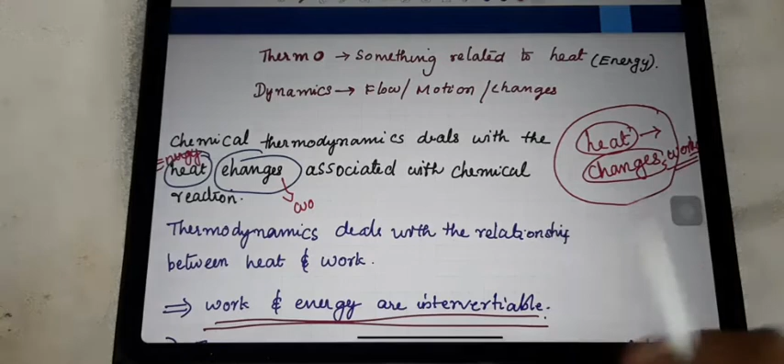So here, heat changes. There are two important terms in this heat changes. Heat change, how it is happening? Due to the work. When any work is taking place, that time the change will happen. So heat and work are the two important terms in thermodynamics. This is the easy way of remembering thermodynamics. Heat changes is said to be thermodynamics, and the heat changes mean the change will happen always when there is work. So heat and work are the two important terms of thermodynamics.

So we can say one more way, thermodynamics is the relationship between heat and work. And this heat, in terms of thermodynamics, we consider as a form of energy. So according to the situation, either in terms of the word heat or energy we are using. So here this heat or energy and work both are interconvertible. That we can explain with the help of different examples.

First one, we are taking food, daily we are taking it. So after having the food, we are getting some energy. Due to that energy we are working, right? So energy we are getting from the food, and because of that only we are working. So what do you understand? The energy is interconvertible. Energy changes to the form of work, right? It is an easy example.

Lot of other examples, it's the turbine, electricity making. You know that when water falls on the turbine, due to the running of the turbine, electricity is produced. So in that example, what do you understand? Turbine rotation, turbine running, it is one form of work. Due to that we are getting electricity. Electricity is a form of energy. So here what happens? The work is changed into the form of energy.

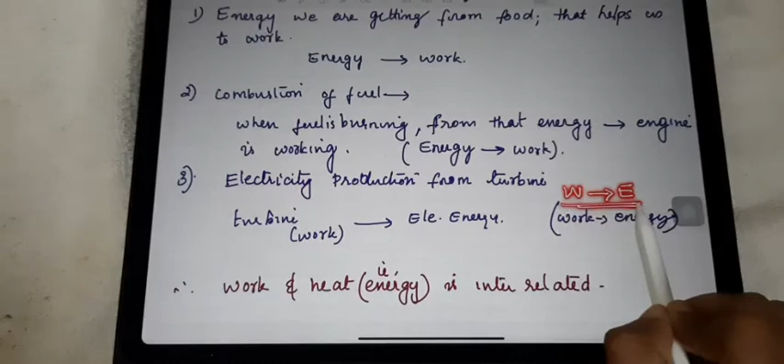So in the previous case, from the food we are getting energy, due to that we are working. So energy is changed to work. But here, due to the running of the turbine, the turbine is working, due to that electricity is produced. So work is changed to energy. That's why we are saying that work and energy both are interconvertible. They are related to each other.

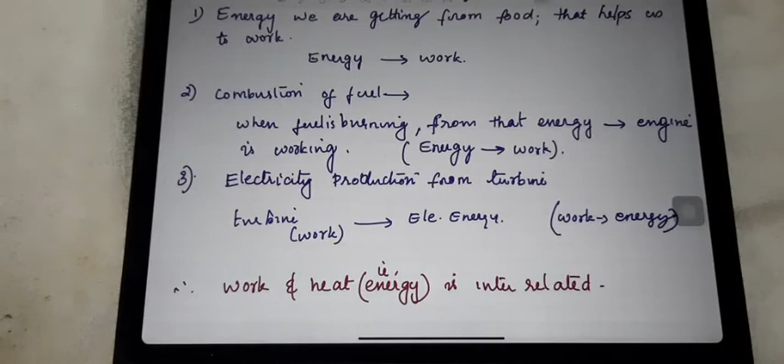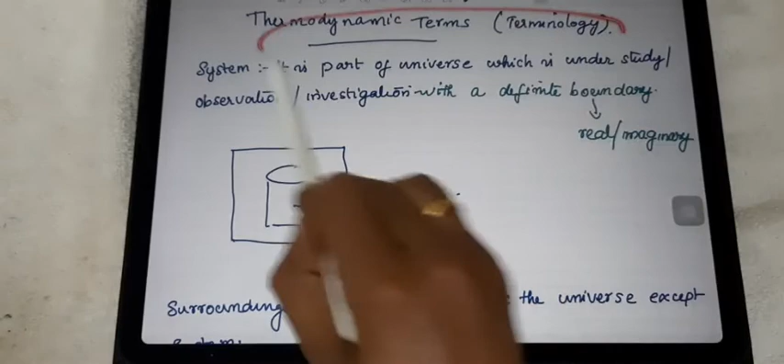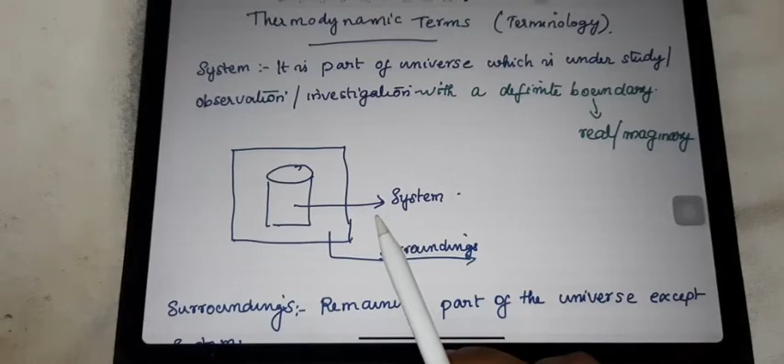Now let us discuss some basic terms which are required in the study of thermodynamics. Important terms, so we can use the term terminology. One of the important terms is system and surrounding. That is a very easy portion, the words system and surrounding. What is meant by the word system? It is a very easy word. So for easy understanding, I am taking one example.

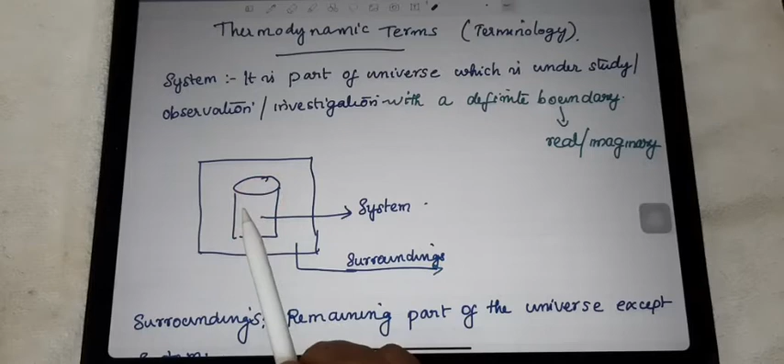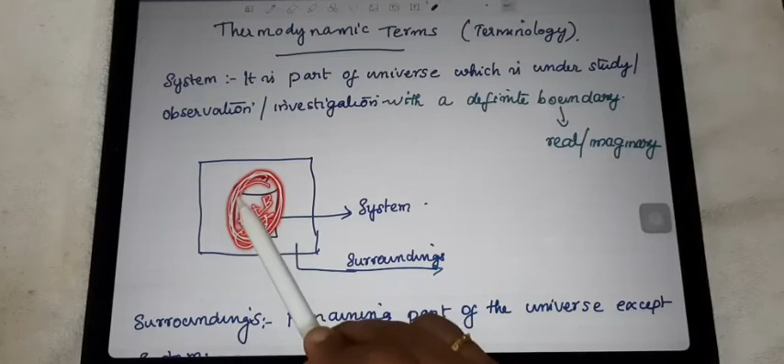This is considered one beaker. In chemistry, we are mainly dealing with chemical reactions. So one of the chemical reactions we are doing in this beaker, just imagine like that. For that I took two components, any two substances taken here, and one chemical reaction is taking place in this beaker. So this beaker we are observing now, or about this chemical reaction we are studying now. So this whole beaker we consider as a system.

Outside of this beaker we call the new word, surrounding. The outside of the beaker, that whole area, whatever is outside of that beaker, all comes under the word surrounding. Okay, so we can discuss the definition now.

The system means it is a part of the universe which is under study. Under study means here we are studying about the chemical reaction in this beaker. That one is said to be the system. It is having a definite boundary.

There is an outside of the beaker, it has a well defined boundary. It's there. Sometimes in some situations we just imagine that boundary. That's why we say the boundary may be real or imaginary. Outside of that, we call it surrounding.

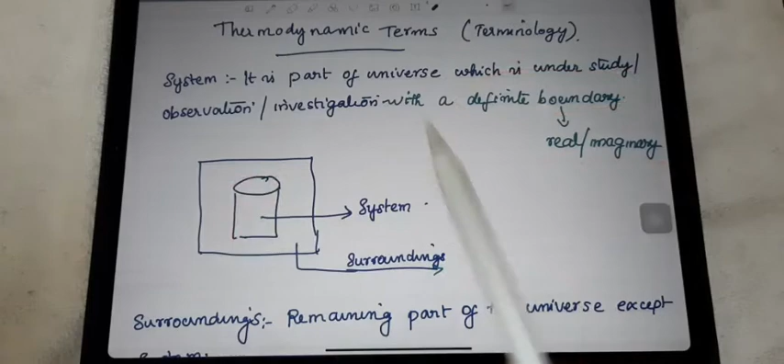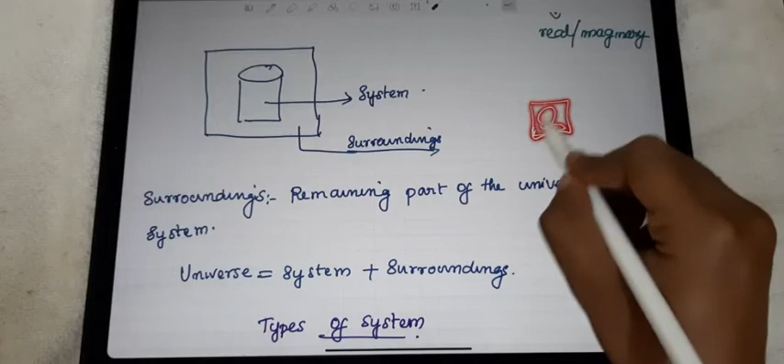If you just imagine the whole universe, when you study about any small thing that you consider as a system, surrounding is the remaining part of the universe except the system. So universe as a total is when you consider system plus surrounding. When you imagine this beaker, whatever is outside it, all together we consider as surrounding. So when you add system plus surrounding, you get the universe.

Now we can start the next topic, types of a system. There are mainly three types of a system: open system, closed system and isolated system. Open system, we can prove with an example.

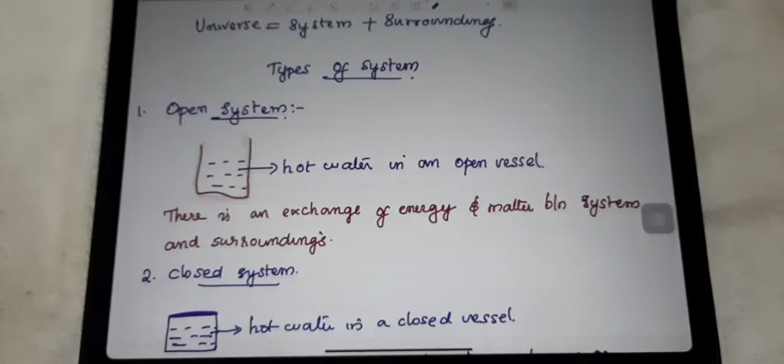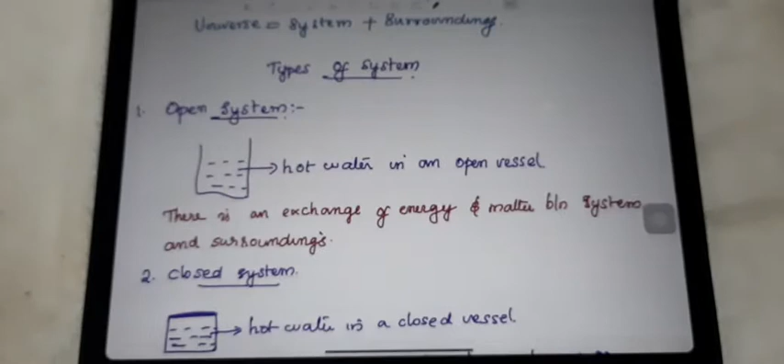Just imagine this is either a hot cup of water or hot tea, anything. So in this beaker I took hot water. The beaker is opened, there is no lid or closed situation. In this situation, after some time, the water will be cooled.

When you wait some more time, what will happen? The content of the water reduces from the beaker, due to the evaporation process. So first it was hot water, after some time it changed to cool water. Then when you wait more time, the content of water reduces again due to evaporation. So what really happened?

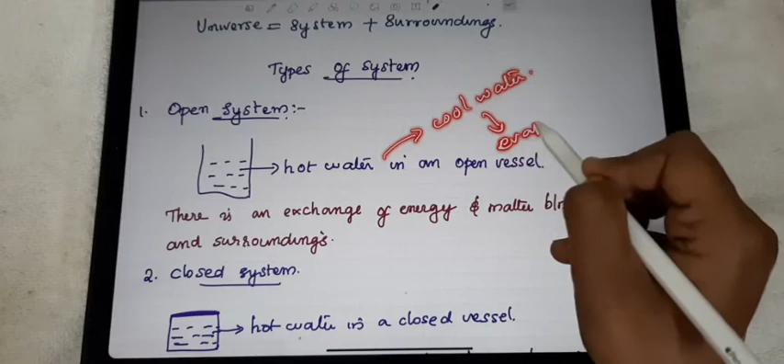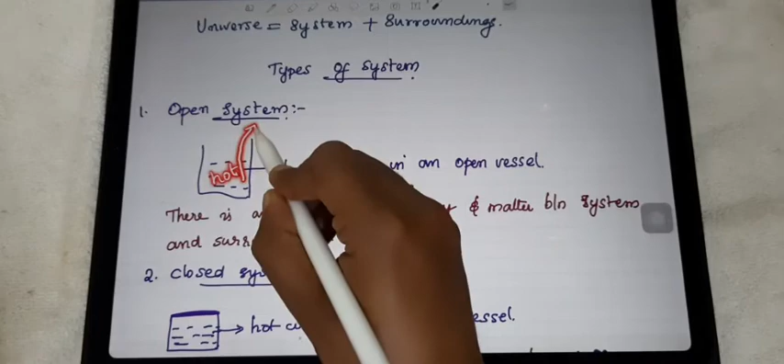Hot water means the heat is the energy form at first. Then how does the water attain the cooling condition after some time? Because this hot condition or heat from the hot water is going out. That means the temperature is going out.

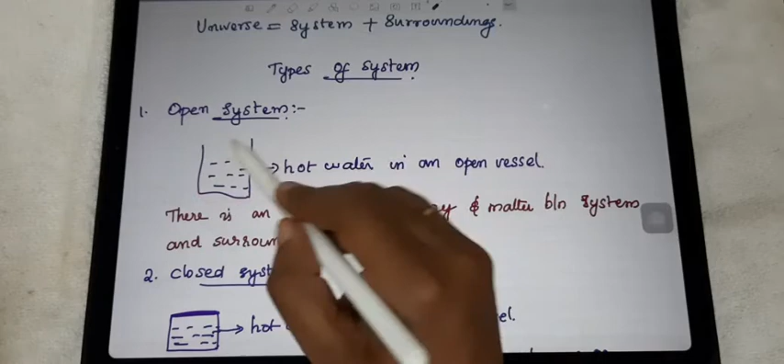So we are studying about this beaker now. We can imagine this as the system. Outside of the beaker, whatever is there, we imagine as the surrounding. Then how can we explain the open system?

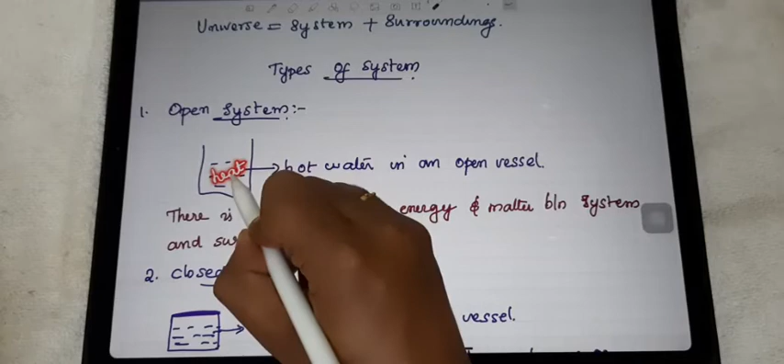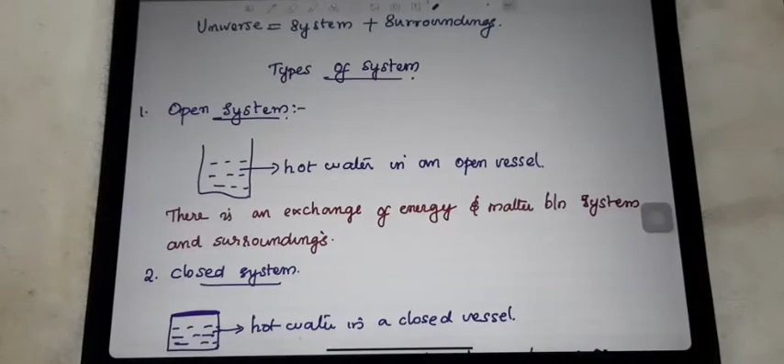Open system is a simple thing. We can explain it like this: the heat from this beaker, that means from the system, is going to the surrounding. So we can say that heat is transferred to the surrounding, that means energy is transferred to the surrounding. That happens first.

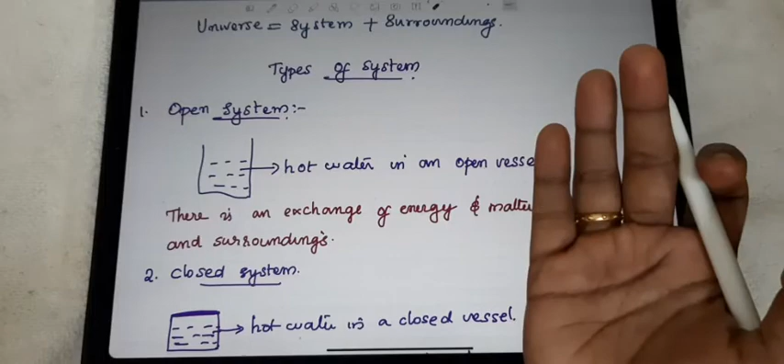After some time, what happens? When it is kept the same way for long hours, what will happen? The amount, the water content, is also reduced. The water, we can say, is matter.

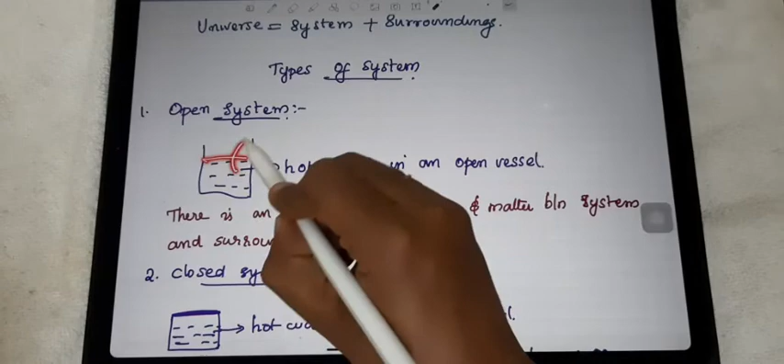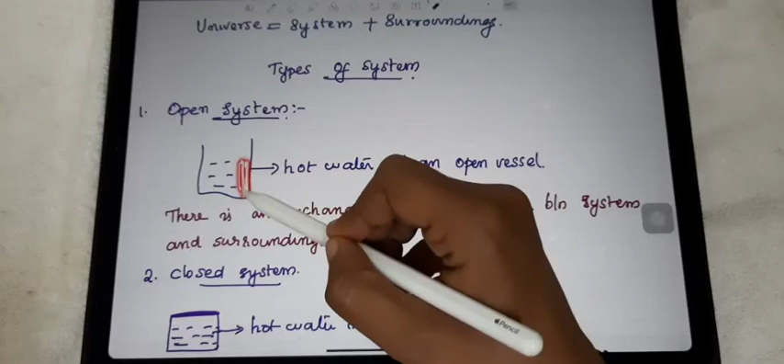First we said that energy is transferred between the system and surrounding. Not only that, we can say that matter is also exchanged from the system to the surrounding. That is why the water content from this beaker is reduced, some of the water escaped as vapor form to the surrounding.

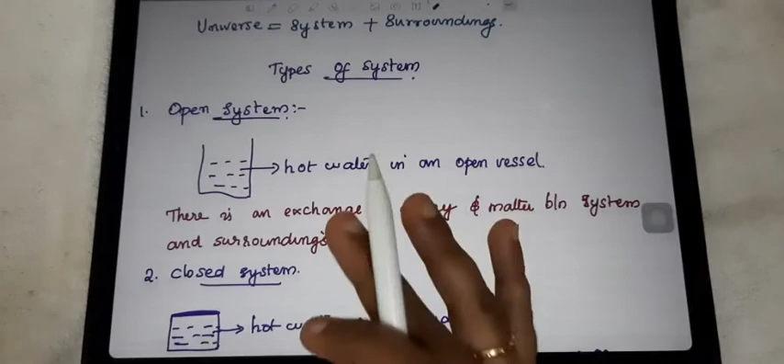So open system means here both energy, that is heat, is transferred, and also matter is transferred. Such a system we call open system.

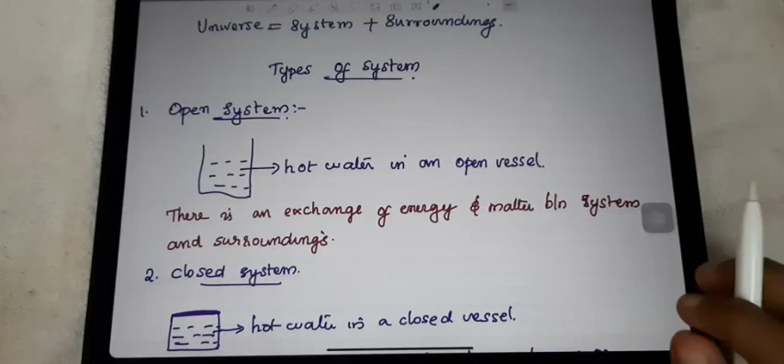Okay, next one, closed system. Just imagine this is one closed system, here hot water is there. So when it is a closed system, hot water is also there. Surely, just imagine after some time what will happen? After 1 hour, it's surely cold water.

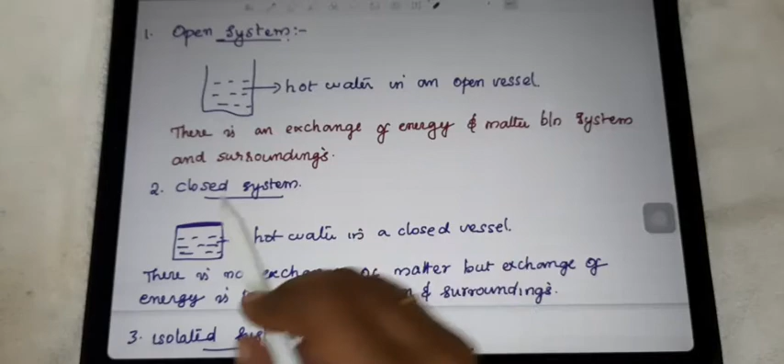What about the content, the matter inside that beaker? There is no reduction of that content, because it is closed. What happens is, due to evaporation, the water molecules, the particles, will evaporate, but when they reach the lid, they come back in the form of water again, due to the process of condensation.

The amount of water is not reduced inside this beaker when kept for a long time, because there is no exchange of matter between the system and surrounding, but heat is exchanged between them. That is why when we touch this beaker, after some time it will be cooled because of the transfer of heat.

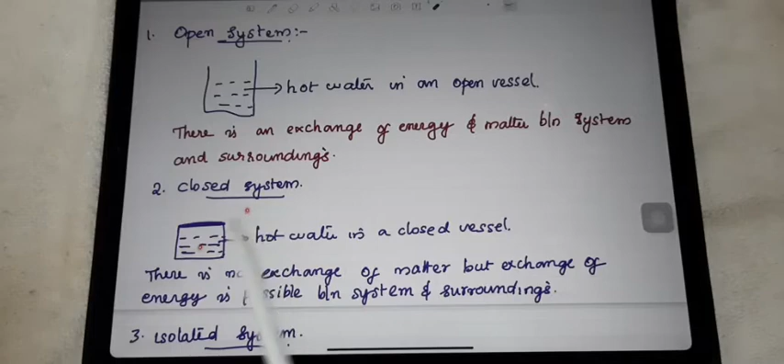So we can say there is no exchange of matter, but there is an exchange of energy possible between the system and surrounding. Heat, that is energy, is transferred, but matter is not transferred.

Next is the isolated system. A simple example is the thermoflask, which we are all familiar with. A thermoflask is used for keeping either cold water or hot water for a long time in the same form.

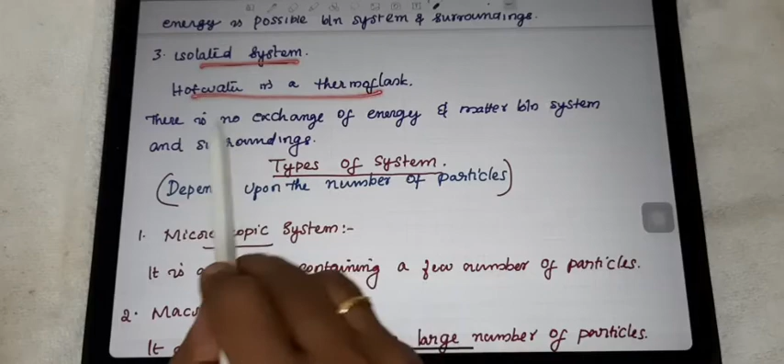So is there any exchange of heat, energy or matter to the surrounding? Imagine the thermoflask as a system. Is there any energy change to the surrounding? No, because that's why it keeps its temperature for a long time. So in an isolated system, there is no exchange of energy or matter between the system and surrounding.

One more way the system is classified is based on the number of particles in the system. On that basis, the system is classified again into two types: microscopic and macroscopic.

Micro means small number, few number of particles. So when the system contains a small or few number of particles, that type of system is called microscopic. Macro means big, so when there is a large number of particles, that type of system is called macroscopic.

In the case of the thermodynamics chapter, we are mainly discussing macroscopic particles rather than microscopic ones. So when you consider the macroscopic particle, what all energy changes and heat changes are happening, on that basis we are mainly studying this thermodynamics.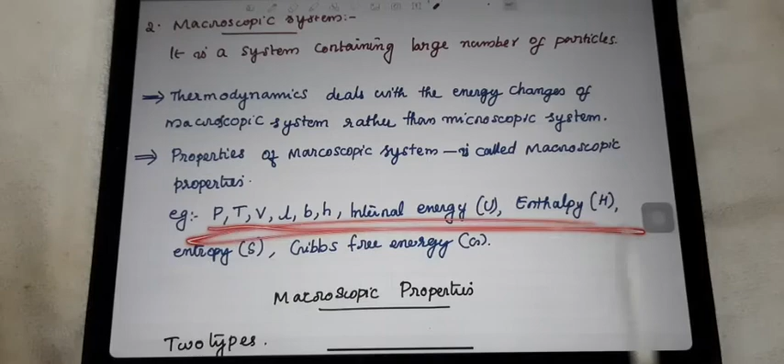Next we need to study macroscopic properties. Properties which are related to the macroscopic system are said to be macroscopic properties. There are a lot of properties: pressure, temperature, volume, length, breadth, height, internal energy, enthalpy, entropy, Gibbs free energy, heat capacity.

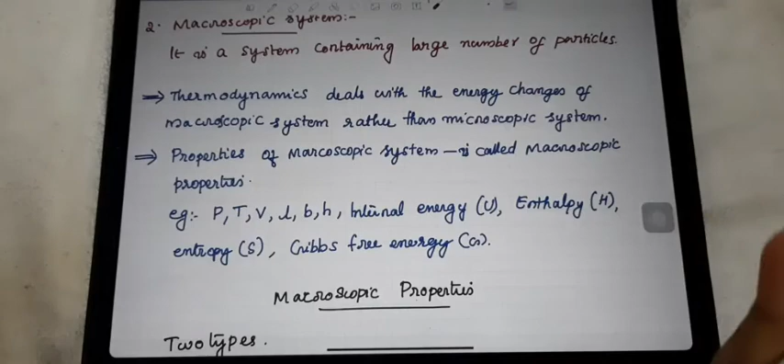These are all different properties that you will study in this chapter itself. So altogether we can conclude there are two types of system: microscopic and macroscopic. We are considering mainly macroscopic particles in this chapter.

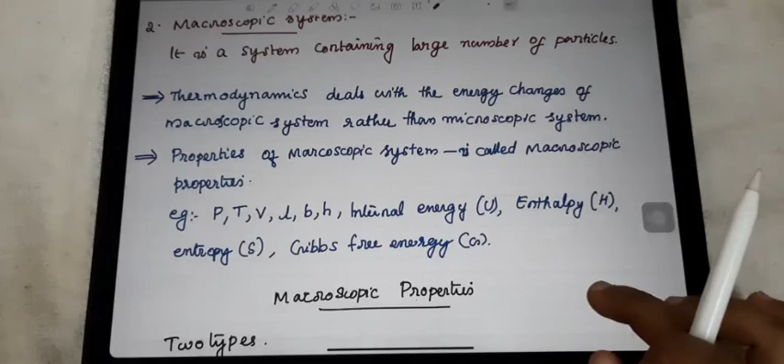Now we can discuss macroscopic properties in detail. There are two types of macroscopic properties, and this is a very important question every time: extensive and intensive. We studied what macroscopic properties are - it is related to the number of particles, when there is a larger number of particles.

That is said to be a macroscopic system, and the properties related to it are said to be macroscopic properties. First, extensive properties means it depends on the amount of matter present in the system, how many number of particles are there. So on that basis everything is decided. The properties which depend upon the amount of matter present in the system are called extensive.

Then intensive - intensive means independent. So properties which are independent, not dependent on the amount of substance present in the system, that is said to be intensive. An easy way to remember intensive is that it is independent. Children are always confused about these words, extensive and intensive.